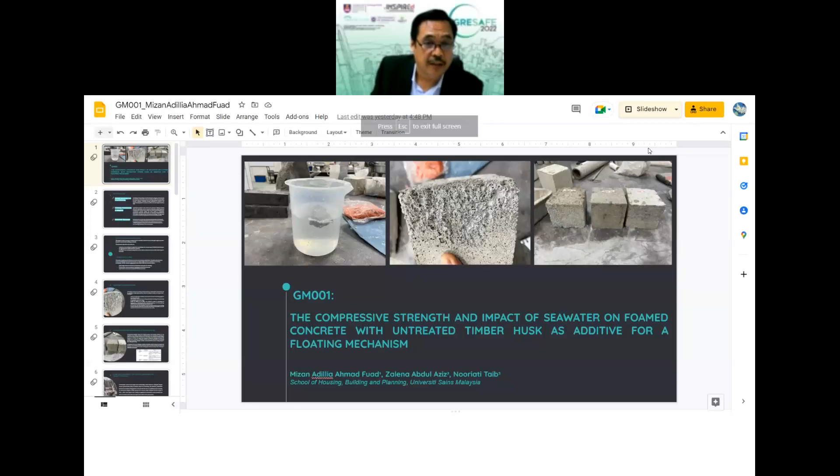Hello? Yes. All right, okay. Assalamualaikum and a very good evening to everyone. My name is Mizan Adillia binti Ahmad Fuad from the School of Housing, Building and Planning, Universiti Sains Malaysia. Today I will be presenting my paper GM001 titled The Compressive Strength and Impact of Seawater on Foamed Concrete with Untreated Timber Husk as Additive for a Floating Mechanism. So to start off,

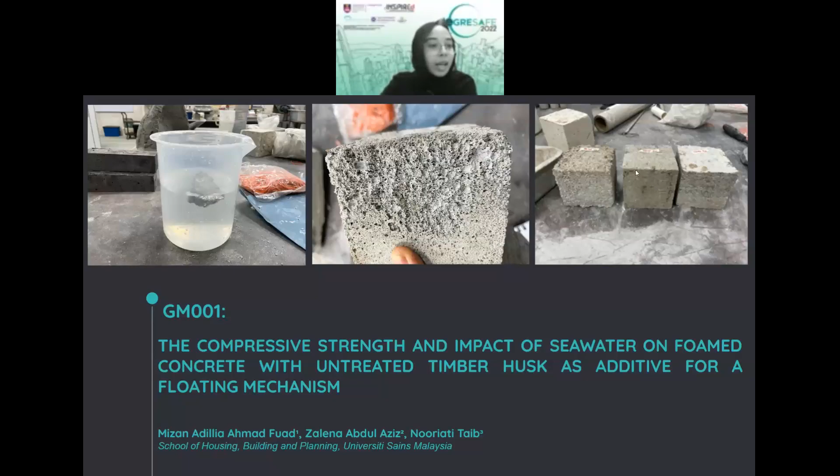I start off with three issues covered inside the paper, which are global warming and land scarcity that is said to be happening, thus causing sea rise level, and the scenario in most cities with the scarcity of land for building development. Therefore, the initiative to create a floating architecture shall be created to counter this issue.

When we come to floating architecture, a suitable material shall be chosen. For this paper, lightweight concrete is chosen because it is a very well known building material that is very diverse and universal. It has a very low density, suitable for the floating structure. But having said that, we come to the exposure of seawater. This material, however, is prone to corrosion, which will reduce the lifespan of the lightweight concrete and its properties.

So for the research objective, it is made to study the timber husk as another element mixed with foamed concrete for the building material. In this research, we aim to first compare the density and the compressive strength of different percentages of timber husk incorporated inside the foamed concrete, and after the concrete is submerged in seawater.

To further analyze, the paper started off with a literature study which covers three sections: the foamed concrete and its properties, construction waste material as aggregate in foamed concrete, and also the impact of seawater towards the foamed concrete.

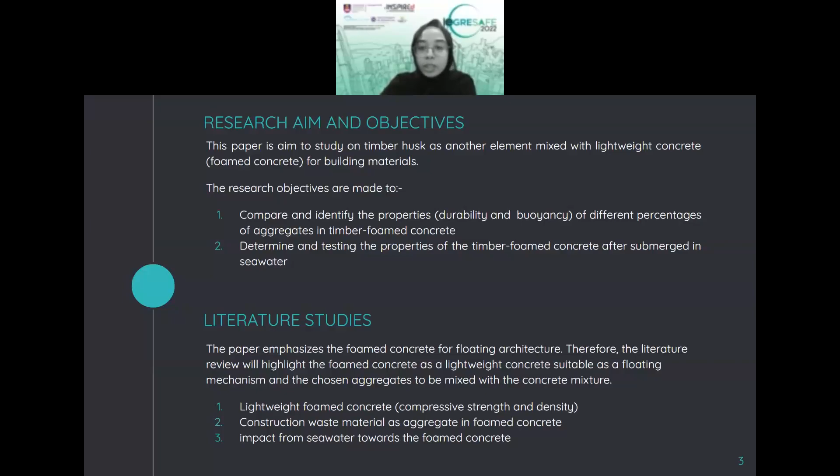So for the lightweight foamed concrete, it is ideally a concrete with air voids made from a foaming agent, which hold a very low density and minimal use of aggregate. This material is better in preserving aggregate, considering that our construction industry is one of the primary users of non-renewable resources, which is sand.

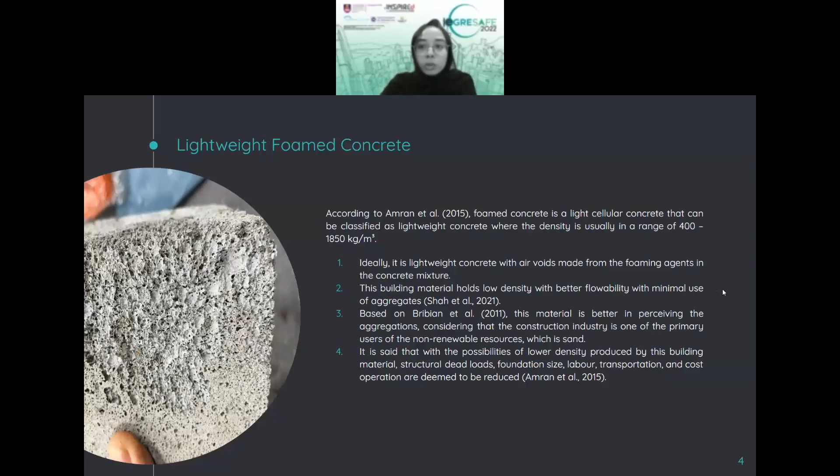When it comes to lightweight foamed concrete, the two properties I want to highlight in the paper are the compressive strength and the density. Compressive strength is the quality of concrete that withstands the load and pressure of the formed concrete itself, and the strength can vary for foamed concrete between 1 to 25 megapascals.

Moving to construction waste material as aggregate in foam concrete, why I chose timber husk is because, to create the foam concrete mixture, studies on construction waste material were made to choose the best suitable waste as additive for the research paper.

Despite several government policy measures aimed at addressing the problem, sustainable resources and waste management on the job site remain a low priority for the majority of contractors in our field. From the literature studies made, I chose timber because it is the highest waste in Malaysia for the construction industry, and it offers a very suitable material to be mixed with concrete due to its sustainability.

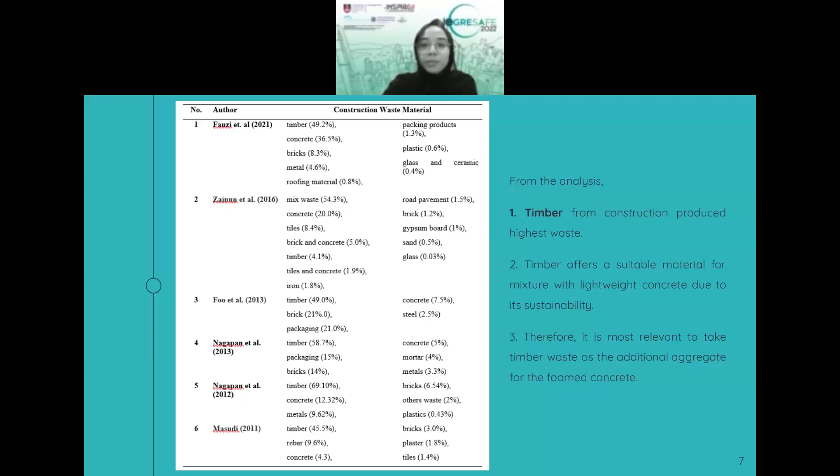Moving on to the last literature review I've made, which is the seawater impact towards the foam concrete. This shows that when we expose any materials in seawater, we will face a deterioration process caused by the complex biological attack process, involving the movement of ions in the concrete mixture and the chemical reaction from the sulfate ion towards other ions from the seawater.

This will affect the properties and the compressive strength of the concrete after being submerged in seawater, somehow affecting the lifespan and the properties, the strength, and everything about the concrete. So this is some of the research on the deterioration process from the material, concrete, impact from the seawater itself.

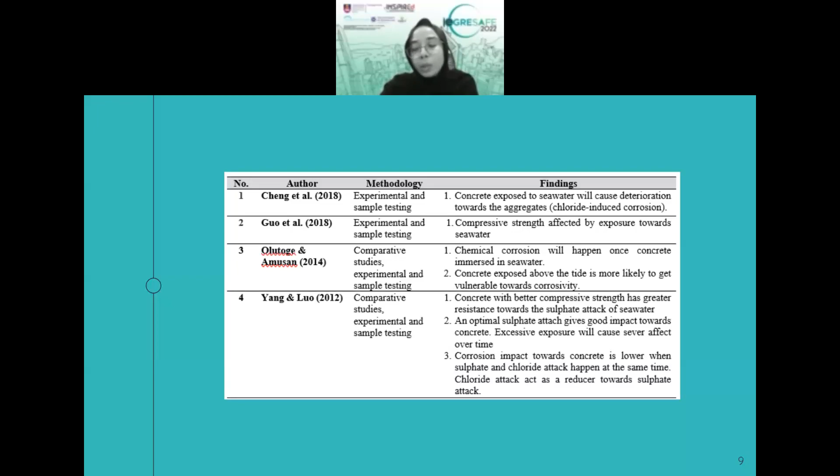Coming towards the material and methodology, in this paper I use a quantitative method where experimental and laboratory testing are used to analyze the result further. The experimental method is taken to test the timber foam concrete and to analyze the impact of the timber husk additive on the foam concrete properties itself.

The process of data analysis involves 3 steps: preparation of the materials, preparation of the concrete mixture, and the laboratory experiment, where I will test the density, the compressive strength, and also the compressive strength after each concrete is submerged in seawater.

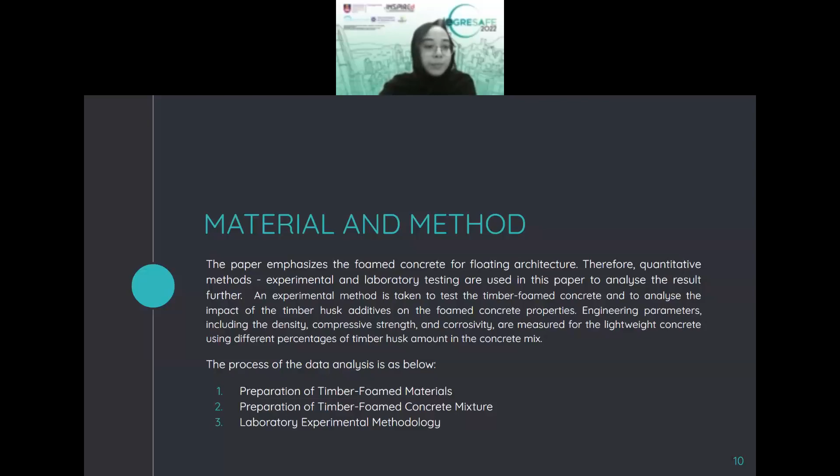The forming agent I use is a protein foaming agent for the concrete mixture, which is the Noraite PA1. For the responding variable, I will be testing the density and compressive strength of the timber concrete for different curing periods, on the 7, 14, and 28 days of curing, and also after I submerge the concrete into seawater.

Coming next is the preparation of the timber husk concrete mixture. For this, I will cover the preparation of mixtures where 0, 5, 10%, and also 15% of timber husk is used.

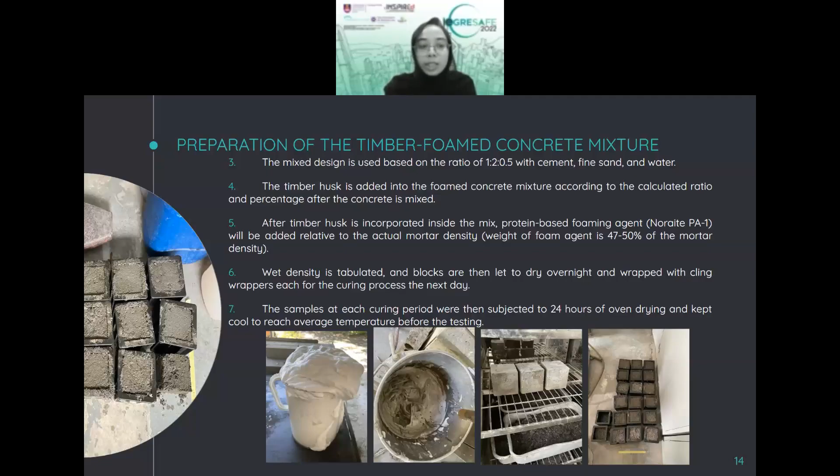When coming to testing the sample, each block will be subjected to 24 hours of oven drying and kept cool to reach the average temperature before testing started.

Moving on to the laboratory experiment. For this research paper, as mentioned earlier, I will take the density and compressive strength of each sample. After 3 weeks of submerging samples into seawater, samples will be tested again to check the compressive strength.

The analysis of the surface of the concrete is then captured so I can see if there is any cracking or white deposits coming from the deterioration effect of the seawater on the concrete form itself. The data is then compared afterwards.

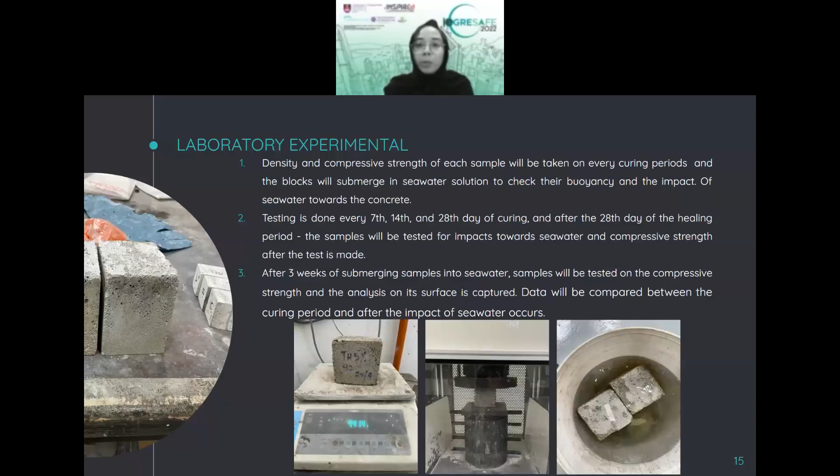We have come to the results and discussion. The first one is density, where the density of all samples shows a good reading, as it shows readings below 1,000 kilograms per cubic meter, proving this material would be able to float in seawater.

The highest reading for density was during the 28 days curing period, shown here, and the lowest was during the 7 days curing period. However, the density after submerging in seawater has increased.

This is the density after submerging in seawater, and it's due to the material's properties, where foam concrete is very porous, and the timber husk additive itself can easily absorb water. This will somehow affect the density after putting it inside the seawater.

This shows the situation when I put every material at every percentage inside the seawater. All samples show that they can float. However, TH15, where I use 15% of timber husk, has the shortest ability to float in water. This might be due to the excess amount of timber husk, as timber properties readily absorb water.

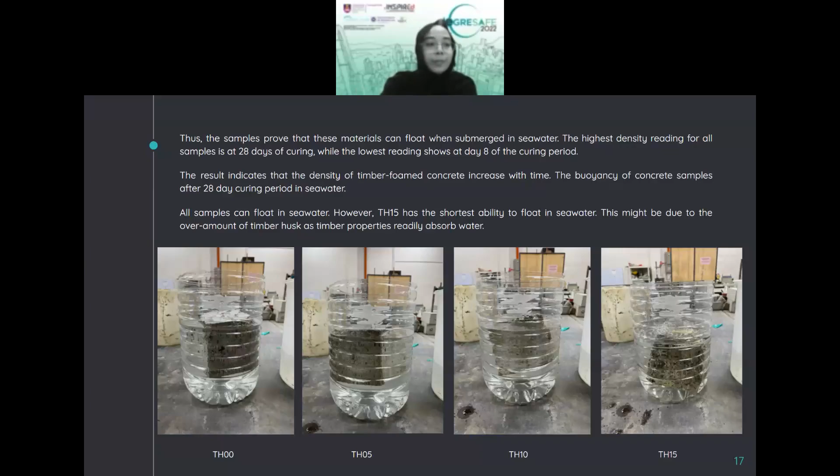Moving on to the second part, the compressive strength. The highest compressive strength was produced during the 28 days curing period, justified by the stable state of concrete properties, because 28 days is when concrete properties reach a stable state. This shows that compressive strength reading increases as the curing period increases, as seen from the graph.

The best foam concrete is when we use 5% of timber husk inside the foam concrete at the 28 days curing period, where the reading shows 2.27 megapascal. However, after submerging in seawater, the reading reduces very rapidly. This might indicate the need for a better additive to be used.

Analyzing the impact of seawater on the sample, here are some pictures I took of the surfaces. This shows the before and after of when I submerged the concrete into the seawater.

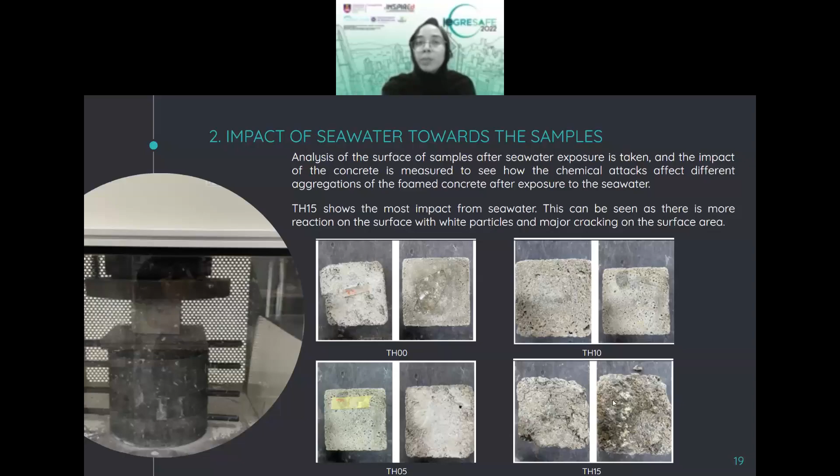Analysis of the concrete surfaces exposed to seawater shows some differences due to chemical attack. Based on my analysis, TH15, with 15% timber husk inside the foam, shows a very obvious reaction to seawater. TH5 and TH10, with 5% and 10% timber husk, show fairly little cracking and white deposits from the seawater. However, TH15 shows a very large amount of white deposits around the surface.

So the impact of seawater towards the sample: what I can say from the experiment is that TH5 shows the best ability and compressive strength after being submerged in seawater. Even though it still decreases, it still managed to produce the best reading for compressive strength, despite getting lower.

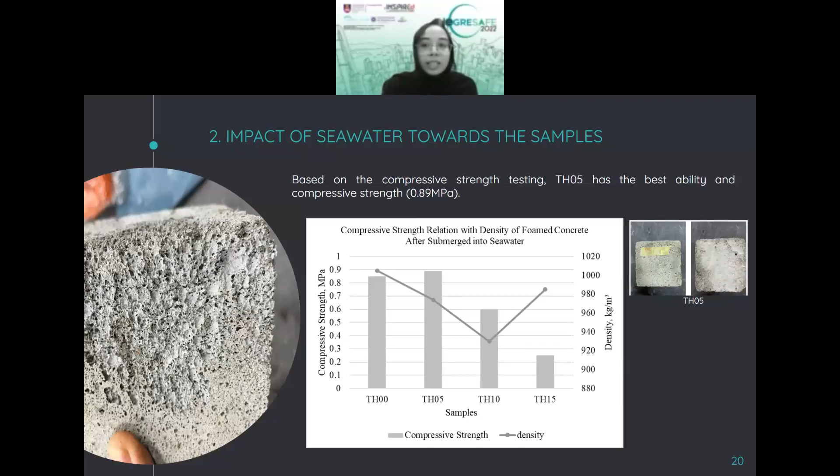And so as the conclusion, what I can say from the research paper is that the research showed the ability to create foam concrete with timber husk as a reliable additive material. But having said that, there is an ideal or optimum amount of timber husk to be added to the mixture itself. From the research paper, I could say that 5% of untreated timber husk is the ideal amount for the foam concrete mixture.

And this proved, however, that timber husk aggregation for foam concrete is better than standard foam concrete because it produces better strength, and at the same time it produces almost the same density, which is able to float in seawater. Besides that, it shows that the timber concrete is able to float and can be used as a floating mechanism in architecture.

So the impact of seawater exposure, however, is a major concern for now. It needs further analysis and a longer timeline for the experiment in order to enhance the material and the additive for foam concrete as floating architecture. So I think that's that.

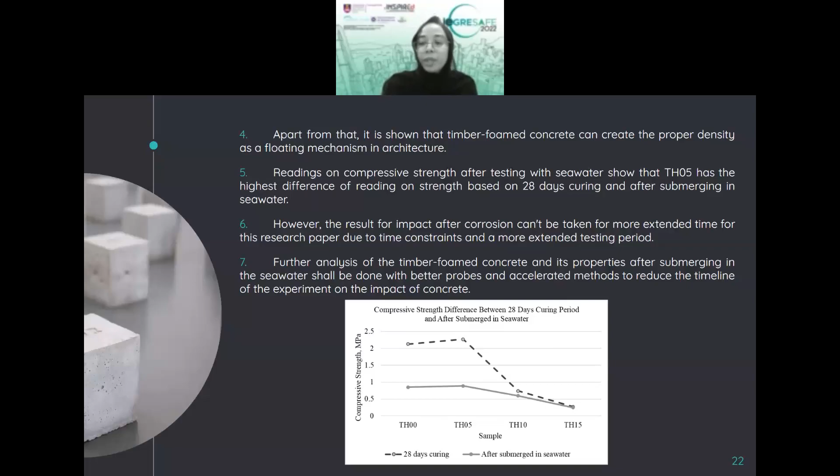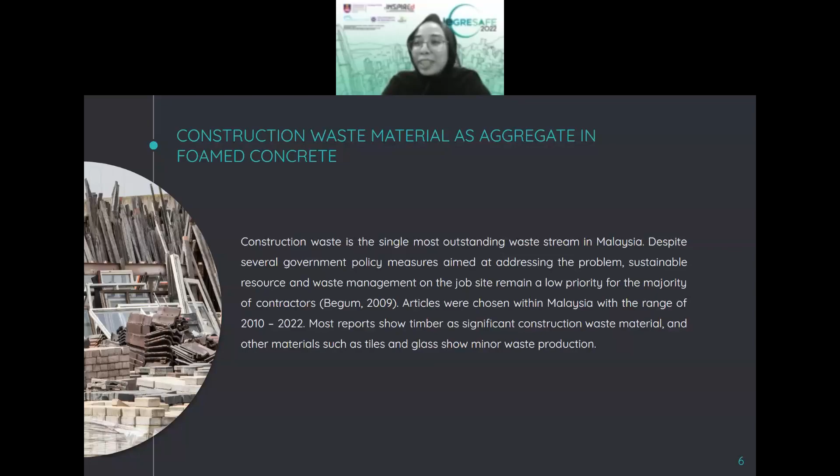May I know what is the foam flow rate for the foam generator? Come again? From Dr. Izzat, I think. May I know what is the foam flow rate? Oh, I'm sorry, I don't have the specification for that, unfortunately. Oh, okay, never mind. Any other questions?

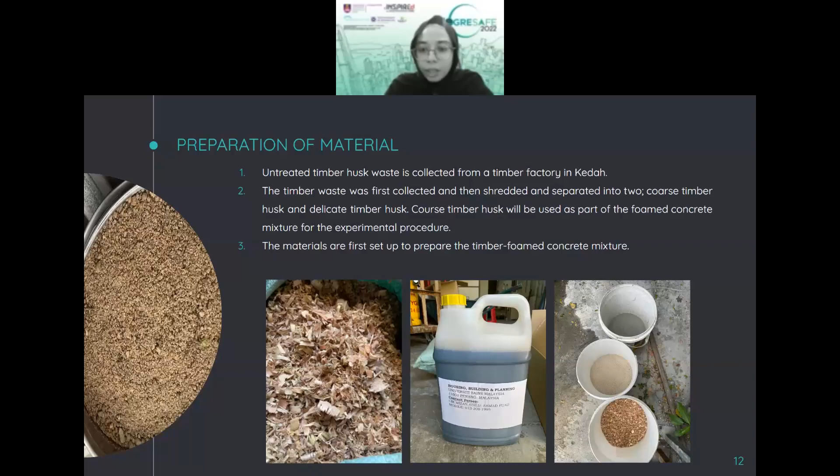Anyway, what's the foaming agent that you use? For the foaming agent, I use a protein-based foaming agent. So I took the Noraite PA-1. Yeah, this one. This is basically what I got from my school. So this is the protein-based foaming agent.

Okay, maybe I missed something. But what's the difference between your samples in terms of the density of the timber husk? Is it a different type of timber, or how? So basically, it uses the same material for the timber husk, untreated timber husk. The difference is the percentage of timber husk I put inside the foam concrete.

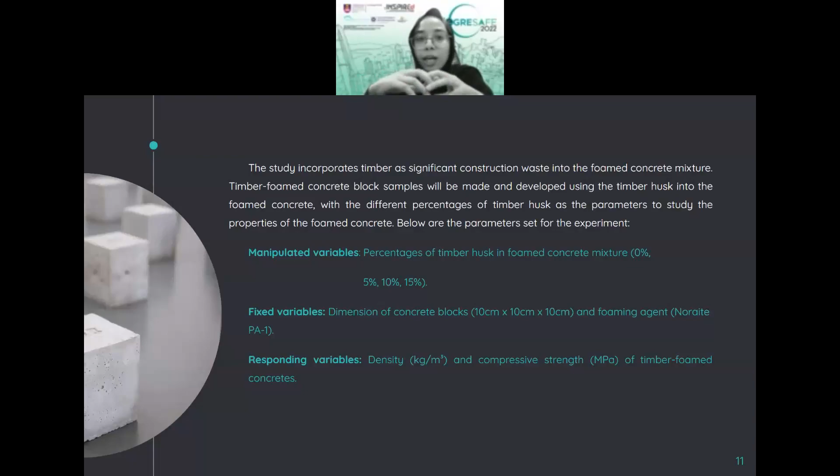So, for example, for A I put 5% of timber husk inside the foam concrete, and then for B, 10%, and then 15%. And I also made the standardized one where I use 0%, to see the conventional foam concrete and compare the differences. Okay, very good, very interesting.

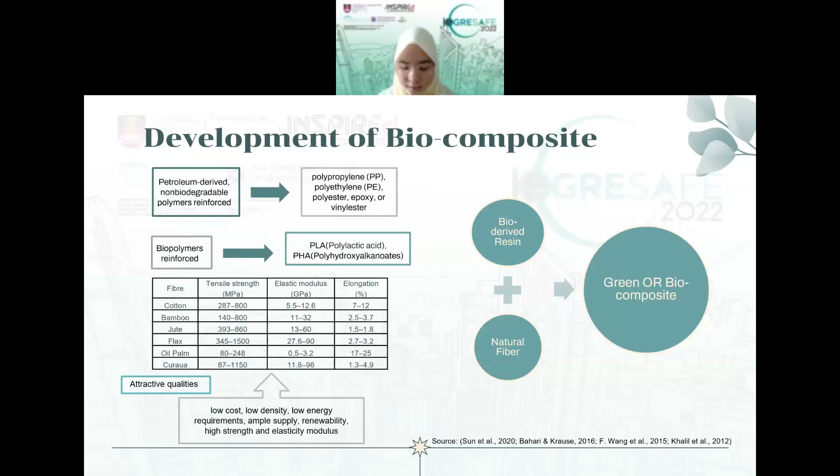So for the bamboo species in Malaysia, because I focus on bamboo, we have 67 total bamboo species in Malaysia, 25 endangered species, 13 commercially used, and 25 exotic species. There are several bamboo species distributed in Malaysia, such as buluh minyak, buluh semiliam, buluh beti, buluh dinding, and buluh semantan. So bamboo also has several attractive qualities such as affordable, plentiful, sustainable resource, economical, strength, environmentally friendly compared to most plants.

So these are the classification of bamboo fiber biocomposite. We can divide it into several elements such as strip, strand, flake, and fiber. For samples of bamboo biocomposite products, we have bamboo mat board, ply bamboo, glued laminated board, bamboo oriented strand board, and so on.

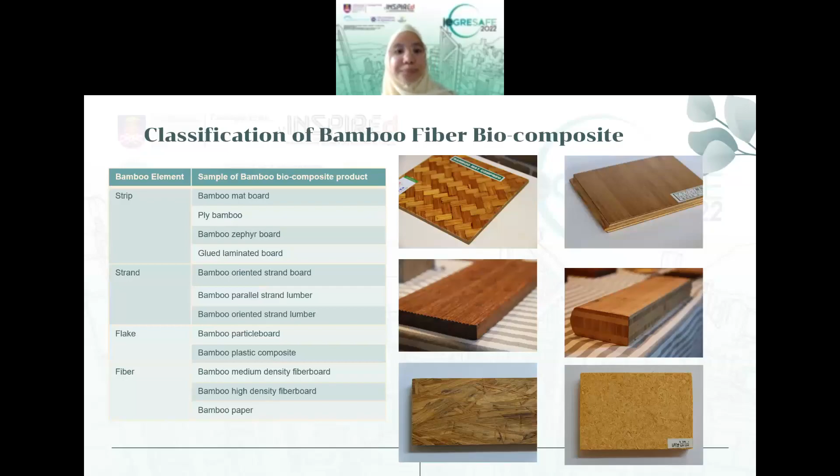So there are several factors influencing the mechanical properties of bamboo fibers, such as moisture content; we know that moisture can cause damage to the fiber matrix interface, resulting in inefficient stress transfer from the matrix to the reinforcement. Degree of cure, which is bamboo possesses the natural honeycomb fiber reinforced composite materials. Extraction of bamboo fiber, which is bamboo fiber can be removed mechanically, chemically, or a combination of the two methods. Orientation and fiber length, which is the orientation of fiber could affect the mechanical properties. And bamboo fiber matrix adhesion, which is there are a few methods that can improve the mechanical properties of bamboo fiber reinforced composites, especially the interface between the fiber and the matrix.

So now we go through the moisture content of the bamboo fiber. We know that moisture content can alter the property of the polymer matrix and the natural fiber itself. The process of degradation will cause swelling of the cellulose fiber, which creates stress at the interface and leads to the formation of micro cracking in the matrix around the swollen fiber, which will cause debonding between the fiber and the matrix.

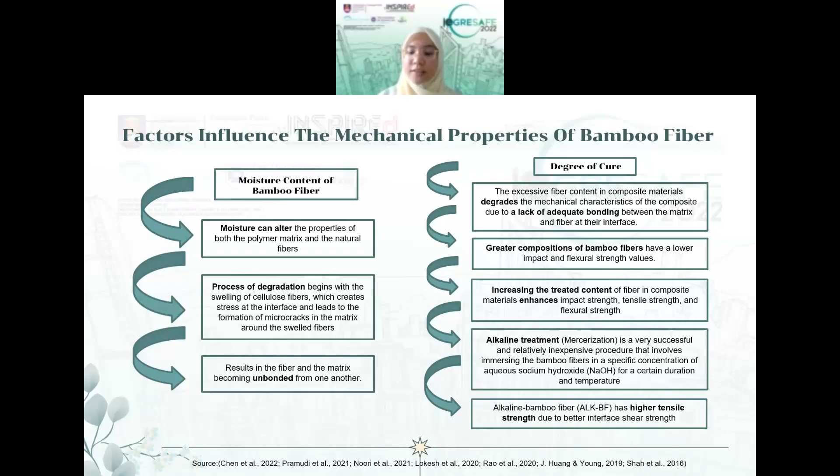So for the extraction of bamboo fiber, it's proven that steam explosion is the best method of extraction for creating high strength bamboo fiber. While for the orientation and the fiber length, when the bamboo fiber length is constant, the tensile strength and Young's modulus of bamboo fiber composite will increase when the bamboo diameter decreases.

So these are for the bamboo fiber matrix adhesion. We can see that in 2016, there are thermosetting matrices, which produce high strength and stiffness values. For bamboo fiber reinforced epoxy, as I mentioned earlier, when the bamboo fiber is treated in alkali, it has a smooth fracture surface, which resulted in better mechanical properties. Bamboo reinforced polyethylene showed that it reached the highest strength. And bamboo reinforced composite epoxy, polyester, vinyl ester resulted in stronger adhesive behavior, which improved resistance to fatigue and micro cracking.

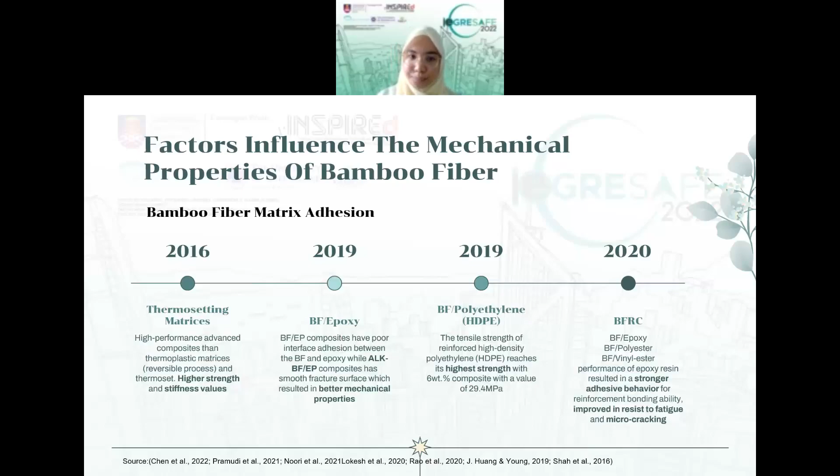So for the conclusion of the review, it showed that bamboo fiber biocomposites are potential candidates for replacing synthetic fiber, as they possess excellent properties such as low density, low cost, high impact resistance, high flexibility, low specific gravity, biodegradability, biocompatibility, and renewability.

But the improper selection of bamboo species would affect the manufacturing process, treatment technique, and durability. This is because bamboo fiber has poor wettability and lower moisture resistance, but it can be fixed with chemical treatments. So the amount of cellulose and hemicellulose has a significant impact on the mechanical characteristics, and also the diameter, length of fiber, fiber content, and manufacturing method are elements that influence the mechanical property of composites.

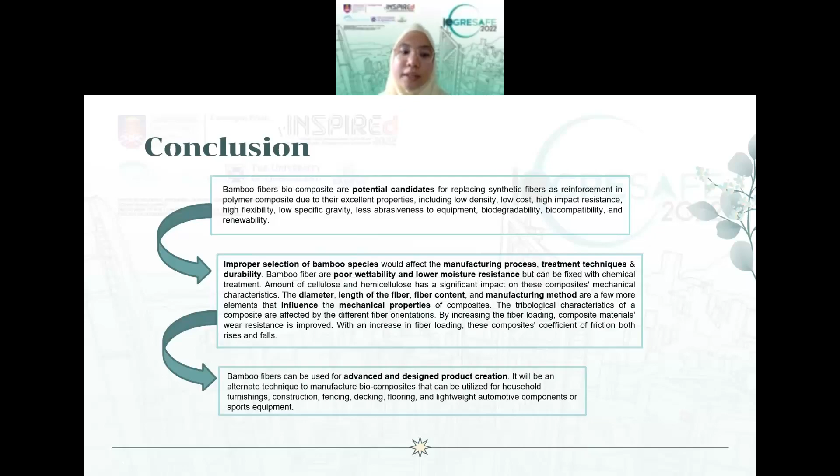So it's proven that bamboo fiber can be used for advanced and design product creation, which can be an alternate technique to manufacture biocomposites that can be utilized for household furnishing, construction, fencing, decking, flooring, and lightweight automotive components or sports equipment. Thank you. That's all for me.

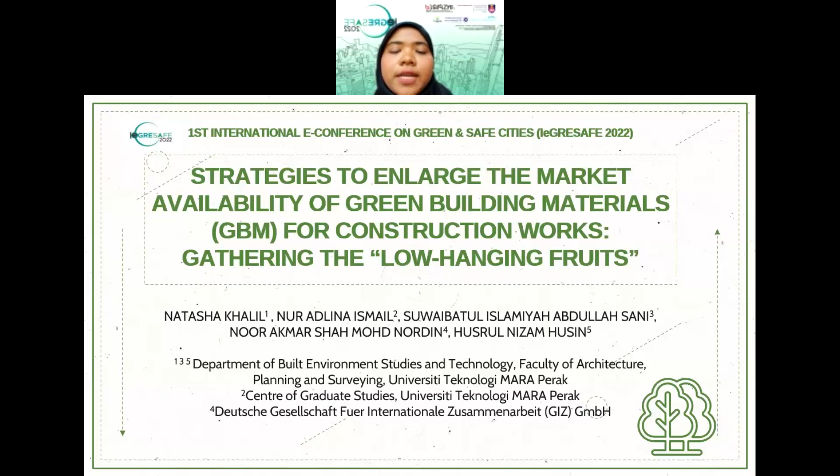As you can see on the screen, our topic for today is strategies to enlarge the market availability of green building materials for construction work, gathering the low-hanging fruits. This is the outline for my presentation today.

For the introduction and background of the research, Green Building Index, GBI, is known as the first green building rating tool recognized in Malaysia. Among the criteria addressed in GBI, utilization of green products and green materials for building construction, GBM, is the easiest way to make a building green, and is addressed as one of the strategic initiatives and best practice requirements by construction stakeholders in implementing green building projects. Application of GBM also gives many advantages such as increased building quality performance and preventing health problems. Then we move to the problem statement.

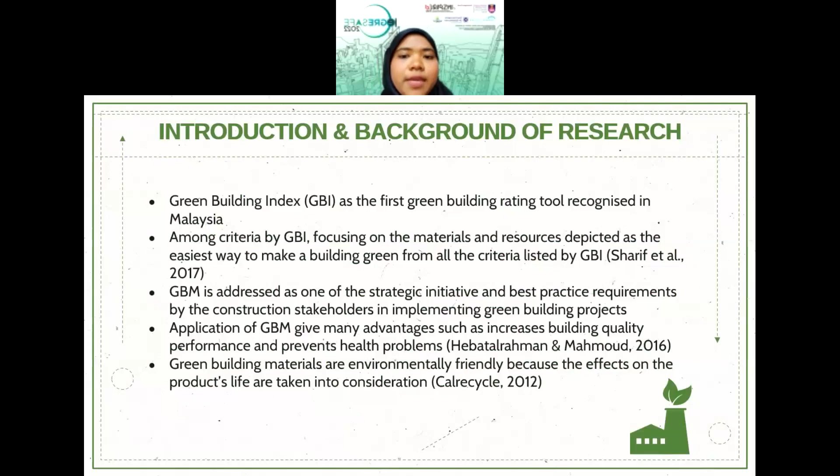Yi et al. has stated that despite its advantages, the implementation of GBM still remains low since it was introduced in 2009. The major issue comes from the financial aspects, as construction stakeholders are always concerned about the financial aspect since implementing GBM requires a very high initial cost.

Other than that, the listed products in the Green Product Scoring System (GPSS) by the Public Works Department (JKR) are not mainly focused on local products, which means the listed green products are also sourced from Global Eco-labeling Network countries such as Australia, Brazil, China, Germany, India, and Indonesia.

The third issue is that the listed eco-label products registered in the My Hijau directory are still lacking in the category of construction materials. In other words, there are not many choices of green building materials for construction listed in My Hijau directory, and this becomes a challenge for construction stakeholders to enhance the utilization of green materials in construction.

The next issue is that the government is unaware of the environmental problems and value of green practice, and the construction industry will not concern itself with the crisis. Without government interference coming up with strict legislation and encouragement, the implementation of GBM in construction projects would still be low. The last issue is that the development of GBM in the construction industry is affected by the low level of knowledge in this field.

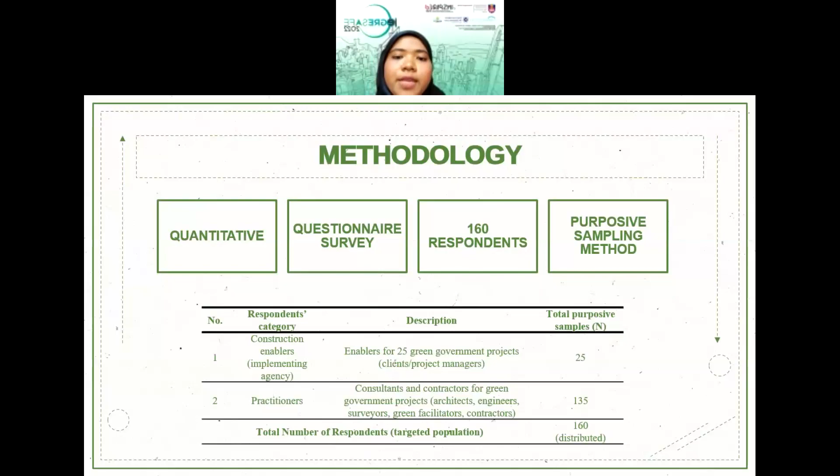We then move on to the analysis of survey results, which is comprised of demographic background, the low-hanging fruit strategies in enlarging the market of GBM in Malaysia, and the last part is the discussion of the results.

The second part is the key catalyst or low-hanging fruit strategies in enlarging the market of green building materials in Malaysia's construction sector.

The highest mean score is the adoption of green procurement for green products and services, accepted as the strategy majorly agreed by the respondents. It is followed by enforcement of green building material through government policies and regulations, and raising public awareness about GBM with sufficient information, ranked second and third respectively.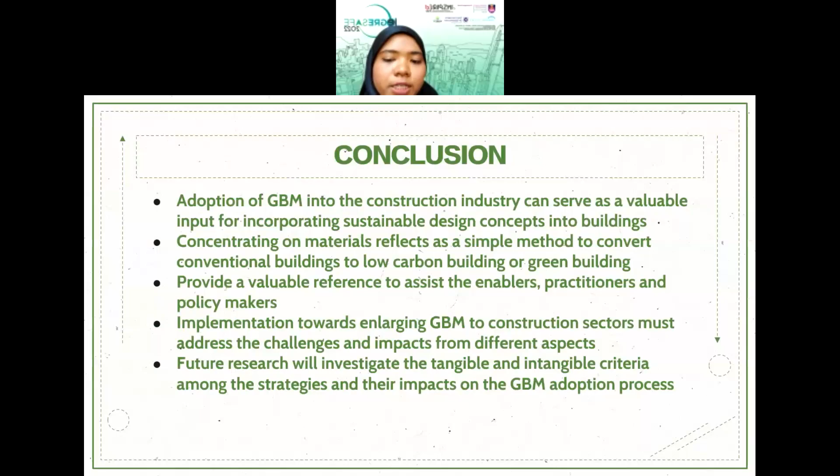The research findings provide a valuable reference to assist enablers, practitioners and policymakers in developing practical strategies for enlarging the market availability of GBM adoption in construction works. However, implementation toward enlarging GBM in the construction sector might face challenges and impacts from different aspects. Hence, future research will investigate the tangible and intangible criteria among the strategies and their impact on the GBM adoption process. That's all from me, thank you.

Wow, wonderful, very good presentation. But I think this is still in an early and exploratory stage of research.

Yes, okay, very interesting. But okay, I'll open it up for the rest. Any questions you want to ask? Miss Nor Adlina, anyone? Please, one or two questions. We still have ample time. Okay, while we're waiting for the questions...

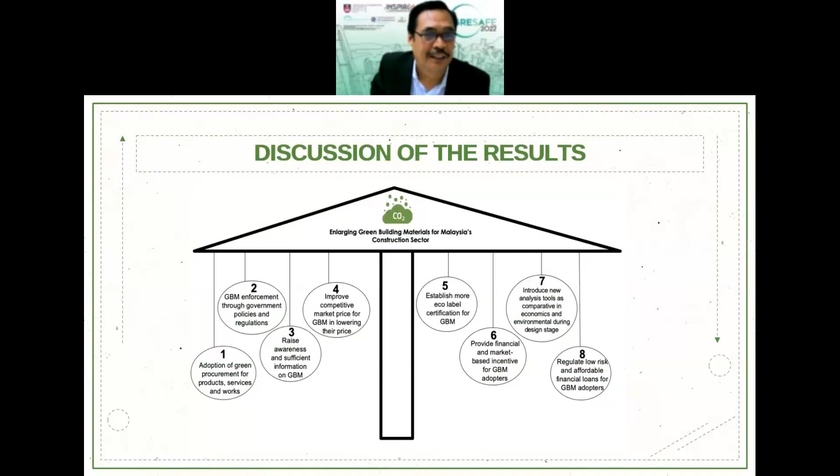Miss Nor Adlina. Yes, okay. I see one of your variables indicating... how do you go to the next one, before this, the previous slide. This one, yes, yes, just now. Previous slide, previous one. Previous, previous slide. Oh no. Yes, okay, stop, okay, okay.

Provide financial and market-based incentive for GBM adopters - this is part of the, what, the incentive, or what do you call it, how to promote the production of GBM, to promote the adoption of green materials among the developers, by having or giving certain financial incentives and so on.

By having the incentive, do you think it is acceptable or viable in terms of financial providers in Malaysia, like bankers? What do you think? Okay, Assalamualaikum, Dr.

Actually this is my research, maybe I can help Adlina answer it because Adlina is my research assistant. She is currently doing a similar study. Maybe I can try to help on the variables in the first part, when you asked about providing financial and market-based incentive for GBM adopters.

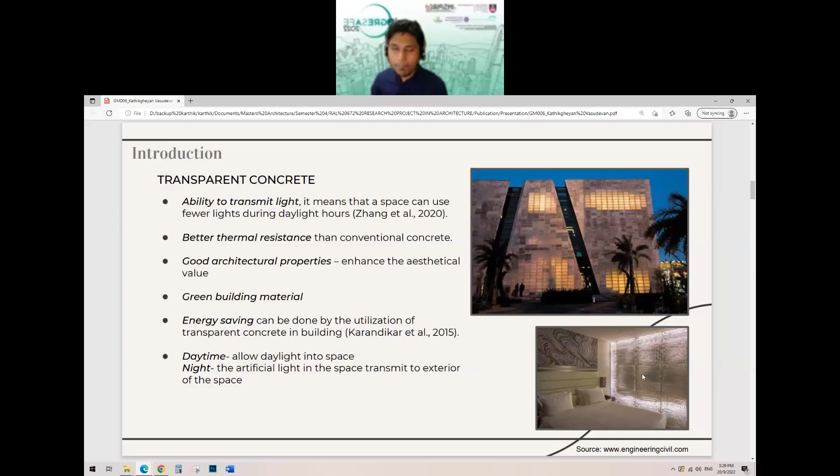For the problem statement, there are two issues I would like to highlight. The first is the high usage of energy in buildings. Based on the International Energy Agency, the construction industry uses almost 40% of all energy generated worldwide, and building energy usage accounts for 20 to 40% of overall energy consumption in industrialized nations, including the high usage of artificial lighting. The second issue is overheating in buildings. Malaysia, being a tropical country, faces a lot of issues because of the sun and incident solar radiation on buildings. Buildings nowadays use glass as a building facade for aesthetic value and to achieve a modern design.

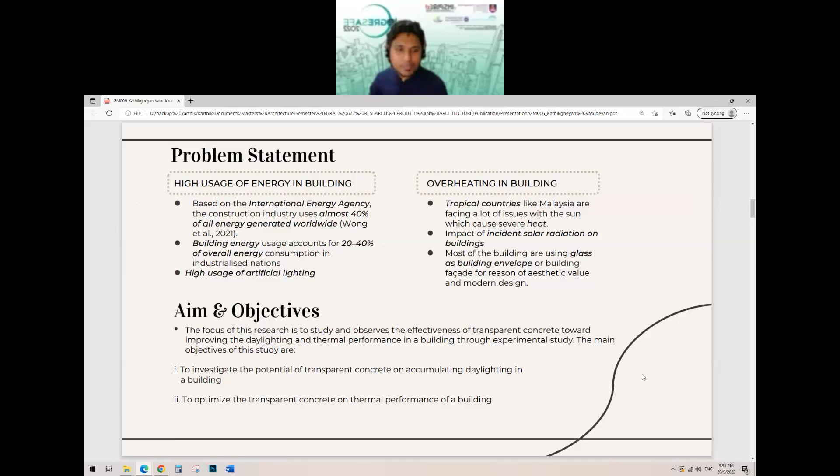The aim and objective of my study is to focus on the effectiveness of transparent concrete towards improving daylighting and thermal performance in a building through experimental study. The main objectives are to investigate the potential of transparent concrete on accumulating daylighting in a building, and to optimize transparent concrete for thermal performance. The table below shows literature studies on the effectiveness of transparent concrete on daylighting and thermal performance from the latest research papers, selected based on Asian countries and countries with a similar climate to Malaysia.

For the material and method, this research employs a quantitative method using experimental study of physical models to obtain numerical results on daylighting and thermal performance. There are 4 phases of process in this experiment, and the fixed parameters set for the experiment include the ratio of the concrete mixture, and the size and thickness of the concrete block.

The manipulated variables will be the ratio of polymethyl methacrylate (PMMA) fiber optic, and the responding variables are the temperature and the light illuminance.

The image below shows the 6 mm fiberglass chop strand and the 1 mm PMMA fiber optic cable that were used in the research.

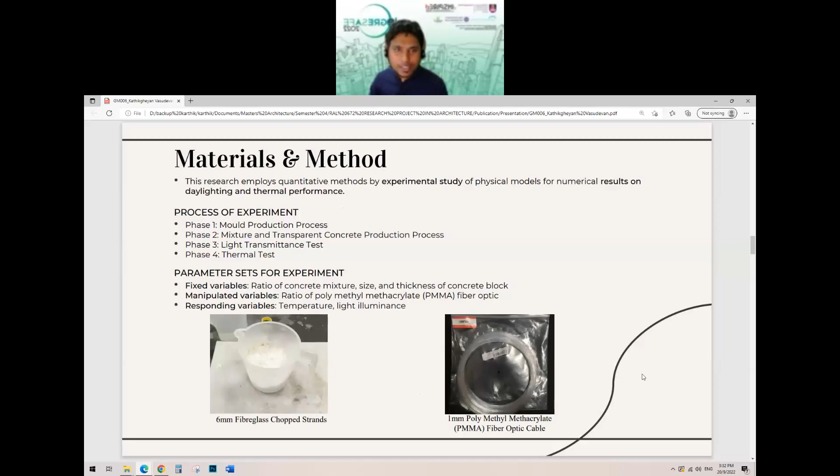For phase 1, the mold production process. The mold was made using a transparent 3 mm acrylic sheet, because my school doesn't have a mold that can produce transparent concrete, so I needed to create my own mold.

Initially, I needed to prepare the sizing and dimensions using AutoCAD software. The number and the distance between holes differ, which helps determine the degree of light transmission and thermal resistance.

The mold, created in AutoCAD, was carefully cut using a laser cutter machine, and the PMMA fiber optic were arranged according to the holes in the mold as shown in the picture below.

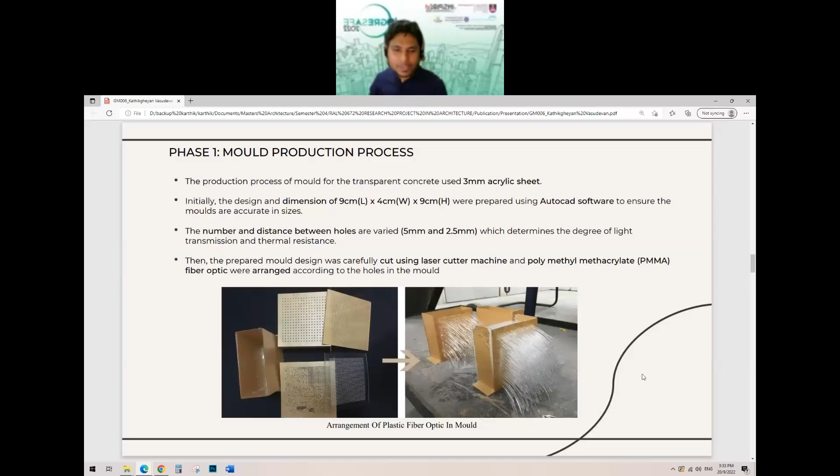The second phase is the mixture and transparent concrete production process. For this experiment, coarse aggregates were excluded, as mentioned earlier in the introduction, to avoid fiber balling issues caused by the narrow gap between the transparent materials during pouring of high fluidity concrete in the block.

For the concrete, cement was used with Sika Grout 215, and it was continuously mixed with water and the fiberglass chopped strands until the right consistency was obtained. It was mixed for 3 minutes.

After the final concrete was produced, the transparent concrete continued with the process of curing for at least 48 hours and proceeded to 28 days of curing in water, then grinding was performed to remove the molds.

These are the mix proportions, with three samples where all the materials are similar except for the number of PMMA fiber optics. Sample A is the conventional concrete, sample B has 290 fiber optics, and sample C has 560 fiber optics. The picture shows the concrete during the curing process and after curing.

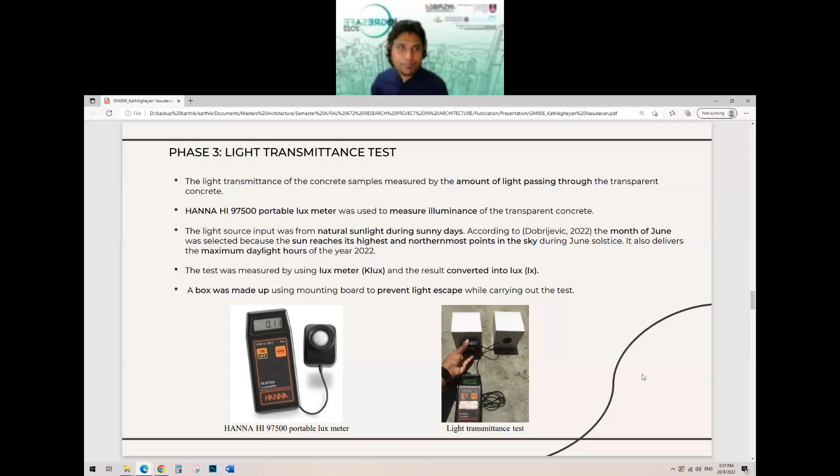For phase 4, the thermal test of the concrete sample measured the surface temperature in Celsius using an infrared thermal imaging camera.

Based on previous studies, the hottest hour of the day occurs between 3 to 5 p.m., which is 3 to 5 hours after noon. However, the local weather at the time of the experiment showed 12 p.m. to 2 p.m. had the highest outdoor temperature on the 3 days of experiment.

For the results and discussion, first will be the effect of daylighting on transparent concrete. The table below shows the transparent concrete with a higher number of fiber optics delivers higher light illuminance, even though the local weather differs across the 3 days.

It also shows using more fiber optic in the concrete allows more daylighting. These are the results for the 3 days of experiment.

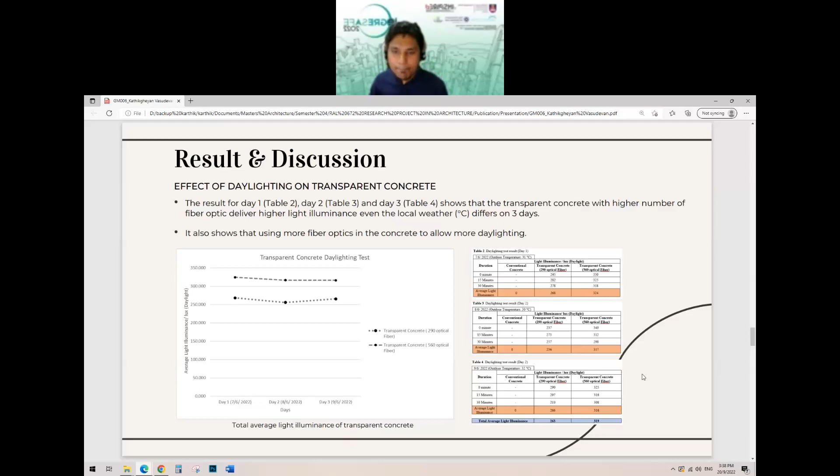The result shows the conventional concrete has the highest average temperature at 0 minutes, 15 minutes, and 30 minutes compared to transparent concrete with 290 optical fibers and 560 optical fibers.

The maximum temperature drop for day 1 is 1.44 Celsius, day 2 is 0.67 Celsius, and day 3 is 0.87 Celsius. The total average temperature difference is 0.989 Celsius. Next, the effect of solar radiation on the thermal—

Okay, sorry, continuing with that. It also shows the higher usage of fiber optic results in less thermal conductivity, and the highest temperature drop on day 1 with high surface temperature indicates the effectiveness of the fiber optic. The plastic fiber optic shows the greatest effect on thermal resistance compared to the conventional concrete.

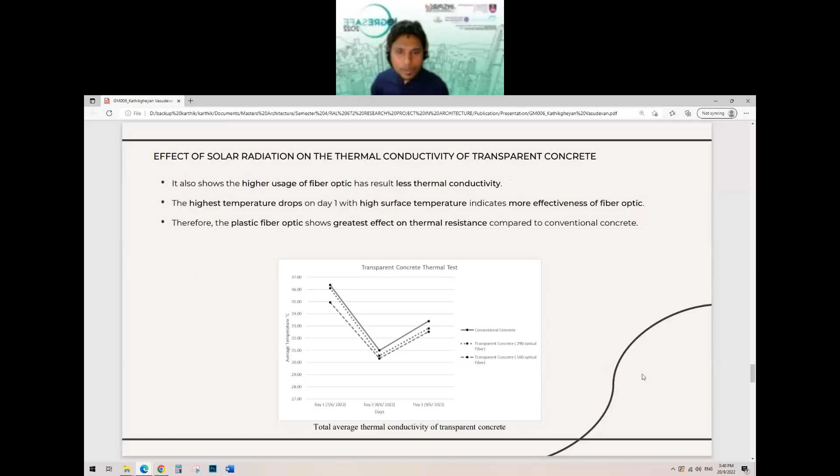For the conclusion, the transparent concrete has a distinct light transmittance property, and it can maximize the daylight usage during the daytime. At night, the transparent concrete can be visually attractive and welcoming for buildings, furniture, and hardscapes. Therefore, the plastic fiber optic shows the greatest effect on thermal resistance compared to conventional concrete. It shows improvement in light transmittance after the percentage and number of fiber optic usage increases.

The main contribution of this experiment shows that higher usage of PMMA fiber optic allows more daylighting and lowers the thermal conductivity and heat gain to a space or building. It also changes the perception of when we receive more light, the more heat conductivity.

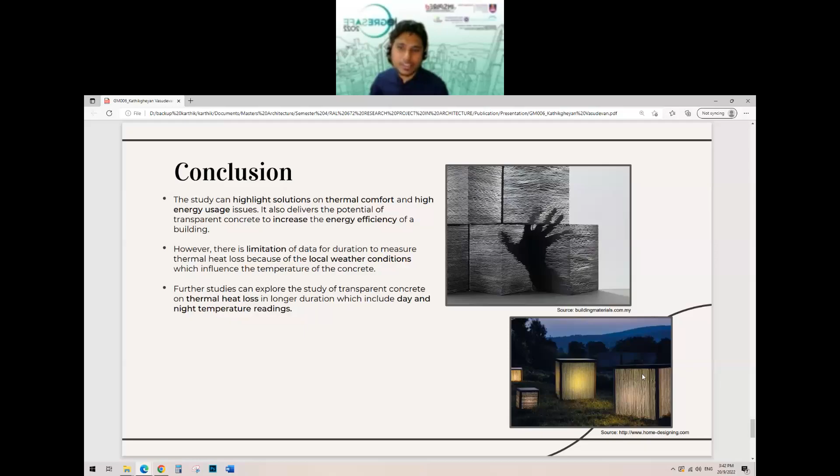Thank you very much, Mr. Karthikeyan. This is actually very interesting and new to me as well. I never came across this product or this material before, it's new to me. Thank you very much, my bad.

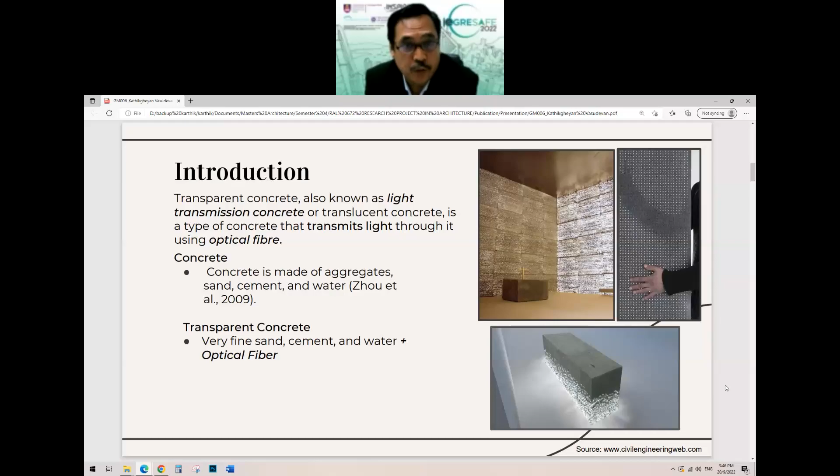Okay, anyway, thank you very much, Mr. Karthikeyan Vasudevan, for a very interesting and very wonderful presentation. Thank you very much. Thank you, Doctor. Thank you.

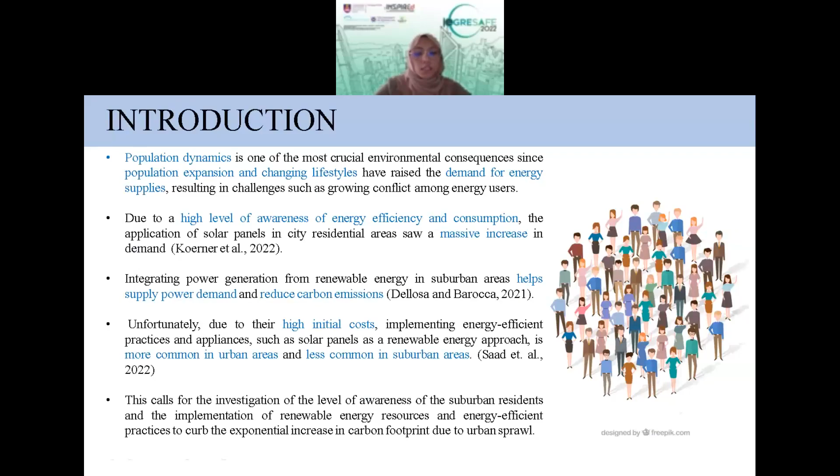Because of this, this calls for the investigation of the level of awareness of suburban residents and the implementation of renewable energy resources. For the aim and objectives: the aim is to establish the need to use energy efficient and renewable energy in monitoring the carbon footprint caused by urban sprawl. The objectives are to investigate the level of awareness of Melaka city suburban residents on

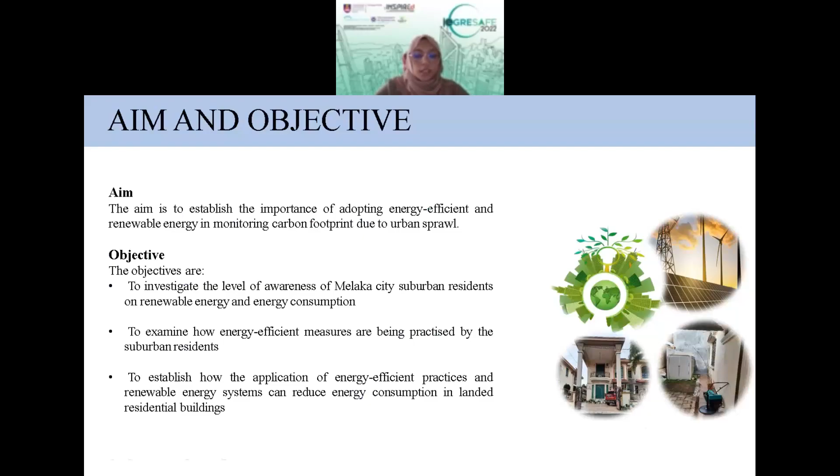renewable energy and energy consumption, to examine how suburban residents are practicing energy efficient measures, and lastly to establish how energy efficient practice and renewable energy systems can reduce energy consumption in landed residential buildings.

For the research review, the first is renewable energy systems in Malaysia. Malaysia has initiated hydropower projects, as seen by the 12 mega dams in Borneo under the Sarawak Corridor of Renewable Energy, for example the Bakun Dam. According to Hamzah 2019, mini hydro, biogas, solar photovoltaic (PV), solid waste, and biomass are among the renewable energy resources available in Malaysia for generating electricity.

In 2020, the entire energy output from these resources was able to generate 11,227 gigawatt hours, claimed to ascend in 2021. Solar PV made a significant contribution among these resources in Malaysia. Next is the energy efficient strategy in Malaysia.

According to Cheam 2021, solar energy offers the greatest potential of any renewable energy source in Malaysia because of the ideal geographical location in the tropical zone. The Malaysian government implements various solar power promotion programs and strategies in response to the high initial adoption cost. This allows solar PV owners to profit from the sale of generated electricity to Tenaga Nasional Berhad (TNB).

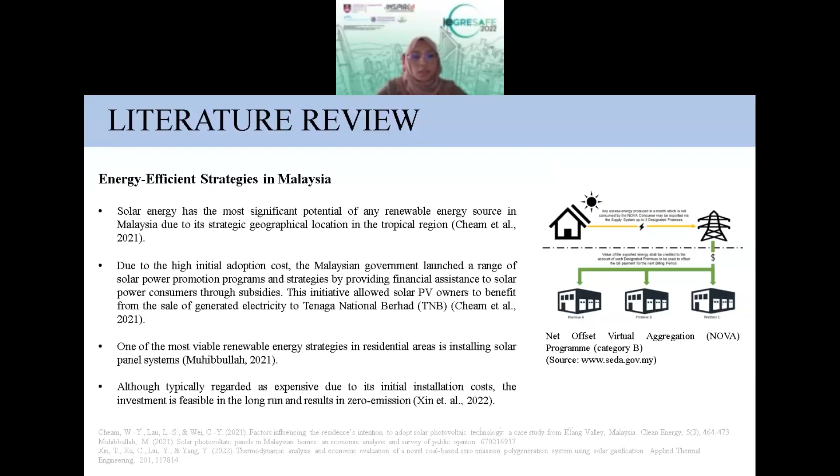Muhibbullah 2021 states that installing a solar panel system is one of the most practical renewable energy options in residential regions. Although initially pricey due to installation cost, the investment is reasonable in the long term and results in zero emission. Next is solar panel systems in Malaysian landed residences.

From the Al-Asadi studies in 2022, renewable energy in residential buildings is the key to excellent environmental sustainability. It reduces the need to burn coal and other non-renewable resources to generate electricity. PV modules on building rooftops provide shading against harsh sunlight, thus reducing the temperature input to the ceiling and the building.

Razali et al. 2020 state that residential customers who install PV solar panels at home could earn money by selling excess power to the local electricity provider, such as TNB and Sabah Electricity Sdn Bhd (SESB). According to Zain Ahmed et al. 2021, the government will execute this from 2021 to 2023 as part of the Net Energy Metering (NEM) scheme 3.0, with a total quota allocation of 800 megawatts to boost solar energy harvesting and increase renewable energy uptake.

Next, the methodology. A questionnaire survey is used in this study, which includes a variety of question styles that allow for an understanding of the use of energy efficient techniques and renewable energy systems. Three residential buildings in Taman Angsa Mas and Taman Kasawari were chosen for their location in Melaka suburban areas to collect building temperature data and investigate the renewable energy system.

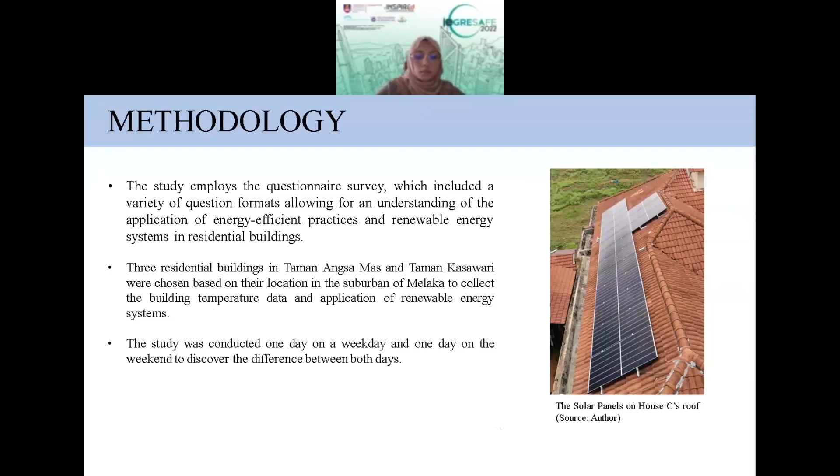To determine the difference, the study was conducted one day during the week and one day during the weekend. Next I will present the findings and discussion. The questionnaire survey was divided into three sections: respondent background, basic knowledge and level of awareness, and application of energy efficient strategies in respective residential buildings.

For the respondent background, 66.7% of the total respondents were female and the other 33.3% were male. For age, 46.7% of respondents were below 29 years old.

And then for the income group, we can see B40 is 23%, and then the majority of them is M40, which is 50%.

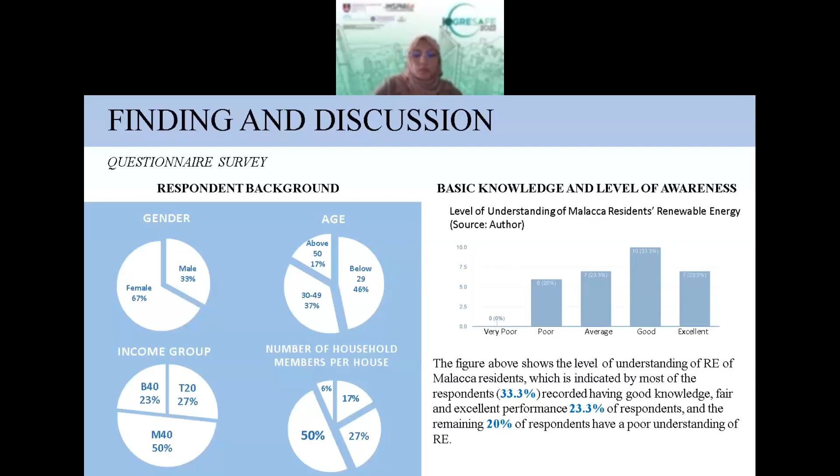So the following section is basic knowledge and level of awareness. So these figures show the level of understanding of RE of Malacca residents, as demonstrated by the majority of respondents, 33.3% having good knowledge, and then 23.3% of respondents having fair and excellent performance, while the remaining 20% have poor understanding.

Okay. For the next slide, we can see the figure on the left shows the respondents' understanding of renewable energy. The mean recorded for solar energy is 0.90, the highest of any power, implying most respondents are exposed to this RE. And then the lowest is 0.23, indicating that some respondents misidentified the renewable energy.

The figure on the right shows the respondents' awareness of electricity usage and bill. So we can see only 3.3% of respondents were uninformed of their usage and bills, whereas 96.7% were. So we can conclude that respondents' awareness of their consumption and expense is high.

Okay, next is the last data for this section. So this table shows the information about respondents' action to reduce their electricity consumption. So we can see that 46.7% of respondents indicated they will turn off the lights and electrics when not in use, and 30% of respondents say they save electricity by only using aircons at night and limiting the use of electronic equipment.

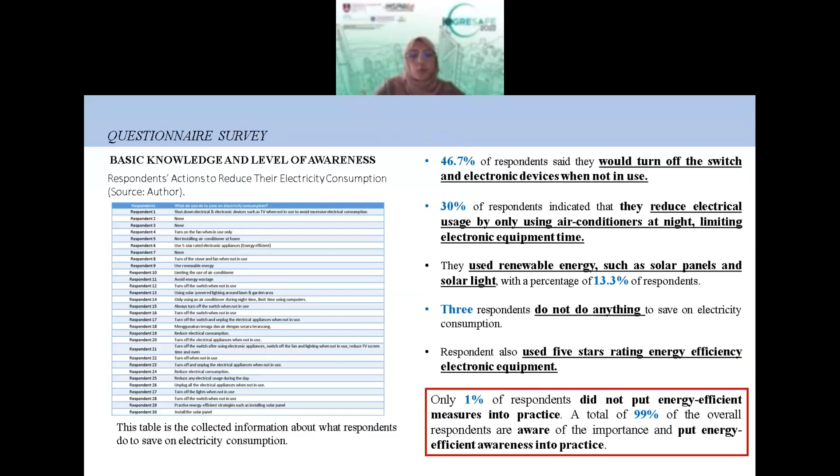Next is the application of energy efficiency and renewable energy. So the figure on the left shows the systems and technology available in the respondents' houses to save electricity consumption. We can see that the mean for LED lighting is 0.57, the greatest among the equipment, while the mean for solar lighting is 0.03 and motion sensor is 0.07, the lowest. And then the smart power board has a mean of 0.1. So finally, 26.7% of respondents have solar panels installed in their home.

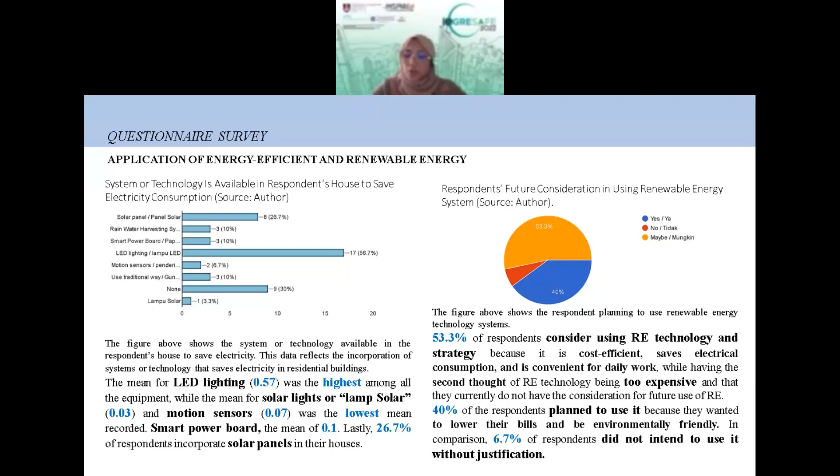So the figure on the right shows respondents' future consideration in using renewable energy systems. So we can see 53.3% of respondents consider using RE technology and strategy because it's cost efficient, saves electricity consumption, and is convenient for daily work. But at the same time, they have second thoughts because it's too expensive for them. And then 40% of the respondents plan to use it because they want to lower their bill and be environmentally friendly. In comparison, 6.7% of respondents did not intend to use it without justification.

This confirms the Al-Asadi claim that the solar panel prevents heat from being absorbed by the roof, limiting the amount of heat transferred. And then the reduced amount of heat reduces the amount of cooling necessary, assisting in reduction of the energy consumption.

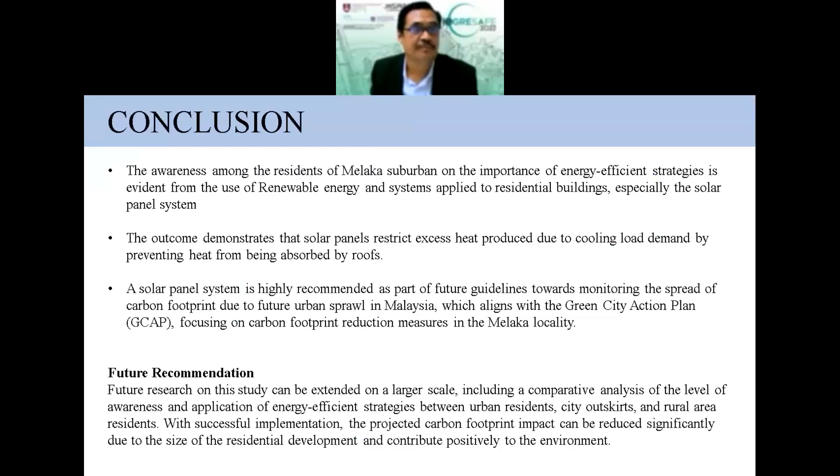So the conclusion is the use of renewable energy systems in residential buildings, particularly the solar panel system, demonstrates the Malacca suburban people's understanding of the need for energy efficient techniques. The results show that solar panels reduce excess heat generated by cooling load demand by preventing heat from being absorbed by the roof. A solar panel system is highly suggested as part of the future role in the measures to monitor

the expansion of carbon footprint owing to future urban growth, which fits with the Green City Action Plan, which focuses on carbon footprint reduction measures in the local locality. Future research could be expanded on a broader scale, including the level of awareness and application of energy efficient measures across metropolitan residents, city outskirts, and rural region residents.

Due to the size of the residential development, the predicted carbon footprint impact can be decreased with the proper implementation and contribution favorable to the environment. Thank you.

Thank you very much, Miss Nur Atika. A very good topic indeed to research. I think this is also in the early and exploratory stage of your research. Am I right? Okay. You are examining the awareness of the users or populations. Okay. My suggestions.

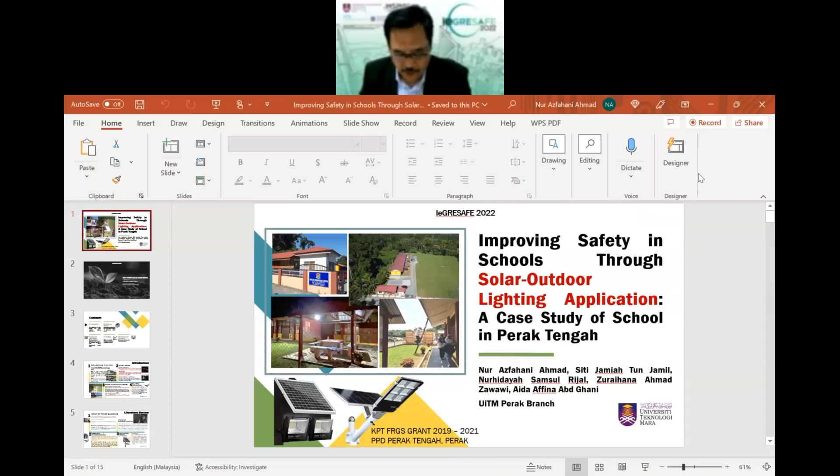Our next presenter will be presenting a very interesting topic also, under the sub-theme of renewable energy, with the topic of improving safety in school through solar outdoor lighting applications, a case study of a school in Perak Tengah. Please welcome the presenter from UiTM Perak, Associate Professor Dr. Nur Azfahani Ahmad. Over to you, Dr. Nur Azfahani.

Thank you, Dr. Fadil. Can you hear my voice clearly? Very clearly. All right, okay. Now I will share my slide. Okay.

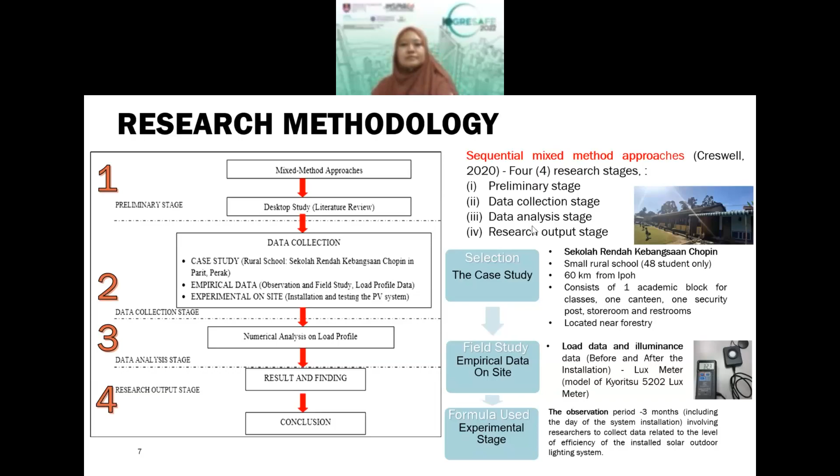So this is my case study in Perak, where you can see it's a very simple school, a small school with only one block of building for classes. Then there's one canteen, one post guard, where all of these buildings are facing a large football field. The sunrise is actually directly from the football field, whereby the northern area is the right side of the whole area. The sun comes from the east, directed to the building.

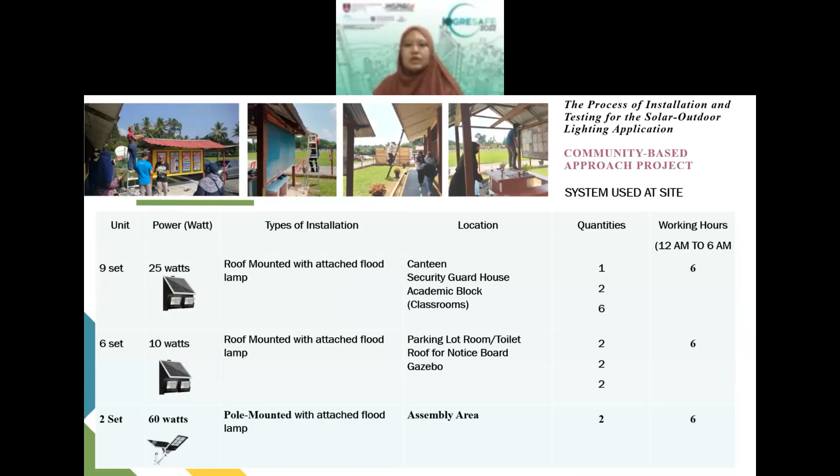This is data that we have collected under a community-based approach. Why do I call it a community-based approach project? Because we obtained help from the community surrounding this school, together with the school's teachers and also researchers from UITM, through the process of installation and testing this solar lighting application.

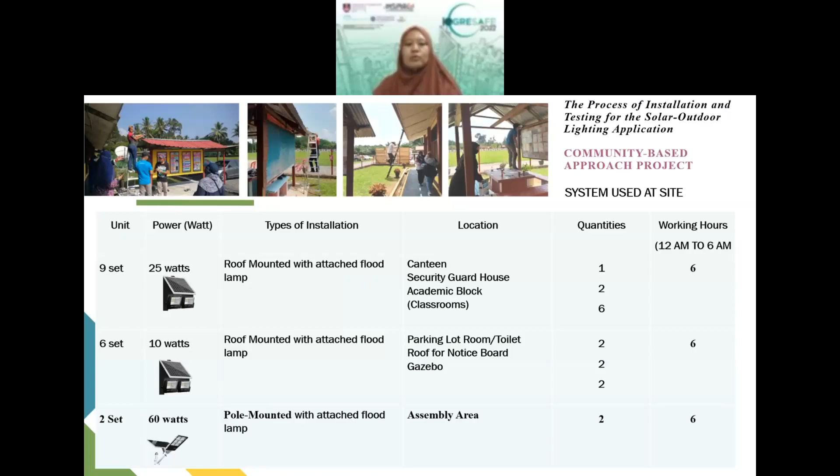As I mentioned earlier, this is a very straightforward research. We only obtained the types of solar outdoor lighting based on the suitable power watt that can be installed for each of the blocks in this building, without calculating the solar energy performance, because it will only lighten the walkway of this school. So we have 9 sets of 25 watt roof mounted solar panels, another 6 sets of 10 watt roof mounted solar panels, and another 2 sets of 60 watt pole mounted solar panels.

After the installation process, we also obtained lux meter data collection, which is used to measure the illuminance level in the case study during nighttime before the installation of this solar PV, and then after the installation, to make comparison analysis on the effectiveness of solar outdoor lighting.

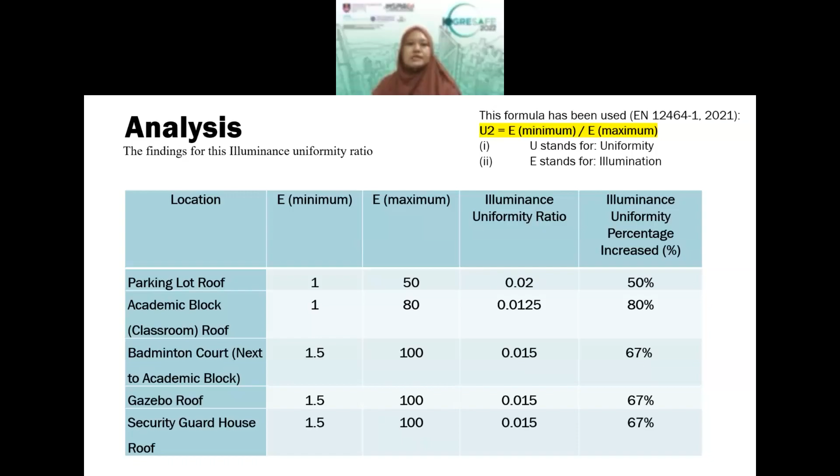This is my last slide, the final output. After this installation of the solar outdoor lighting, it is found that this school managed to improve between 50 to 80% illuminance uniformity ratio around the school. It has strengthened that by installing this solar lighting system, it provides security and illumination in the needed areas. It's also very cost effective, easy to maintain where the school management can maintain it themselves. It also helps increase the safety level of the rural school together with the community environment surrounding the school.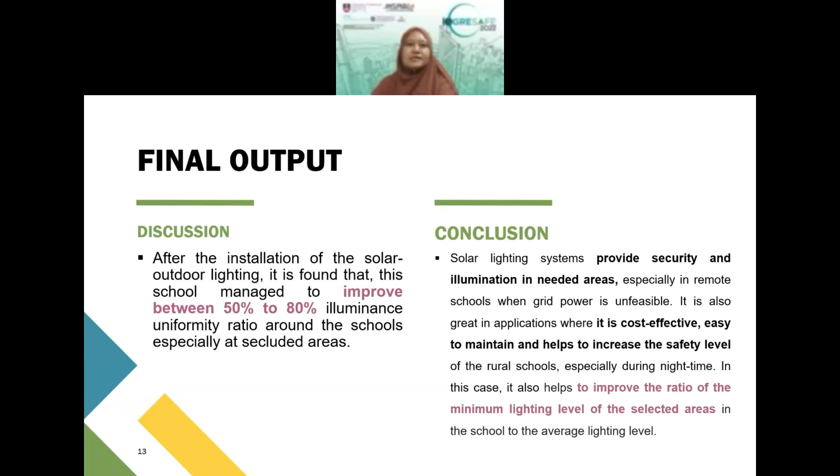So this is our research achievement, whereby this project has actually been published in the magazine, and also we have signed an MOU with the PPD. That's all. Thank you very much.

Oh, thank you very much, Associate Prof. Dr. Noasfani. Very interesting, yet very insightful presentation. Very interesting, actually. Any questions from the floor?

Any questions? Okay, by the way, from myself, PM Dr. Noasfani, we understand that the solar intensity in Malaysia substantially changes and varies throughout the year, especially in terms of its intensity and orientation. How did you address this in your research, and do you simulate these changes or differences by having specific tools or systems or anything?

Okay, thank you, Dr. Fadil. To answer that question, for the overall process of my research, as I mentioned earlier, this is actually an FRGS grant research. We have actually used certain simulation for obtaining the solar performance data. We collected the data from 8 a.m. to 2 p.m. solar peak hours, and from that data we obtain the highest irradiance for each locality, for each school. For the purpose of this paper, I only show the data related to illuminance reading before and after, because it's quite straightforward research.

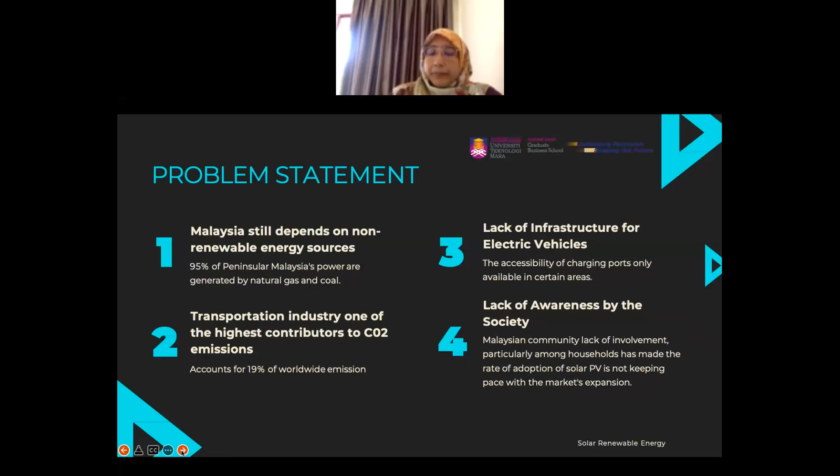So next, the objective of this study is to develop expanded use of renewable energy to boost electric vehicles and achieve the target of carbon neutrality by 2050. Basically, this presentation today is to propose a framework on how we can accelerate this initiative in terms of implementation.

For the literature review, renewable energy is seen as a potential solution, possibly the only solution to replace fossil fuel, as fossil fuels are being depleted around the world, along with the issue of global warming caused by greenhouse gas emissions.

This was studied by K. Solagi. The Malaysian government, based on all these issues happening around the world, identified solar as one of the most potential renewable energies. This was also reported by Saripuden and colleagues in 2022.

Solar can be one of the most potential renewable energies, especially in Malaysia. Our area, our climate, is actually very suitable to accelerate the use of solar energy. It is predicted that solar potential in Malaysia could be 4 times the world fossil fuel resources. So solar is one of the answers to the climate change issue in the world.

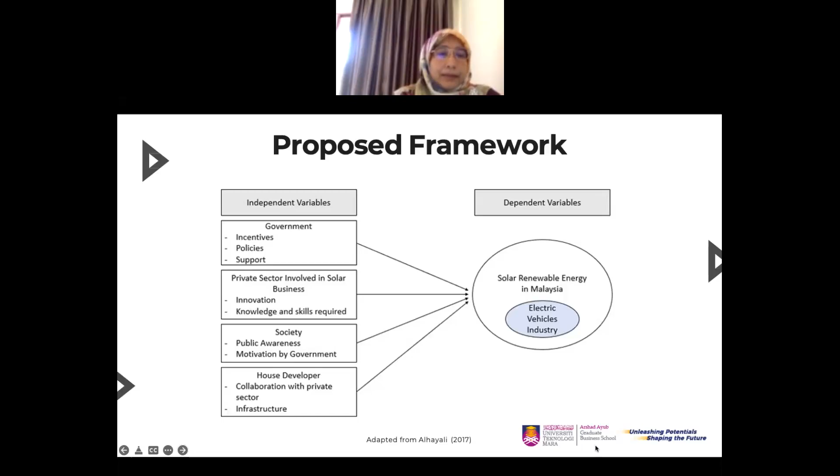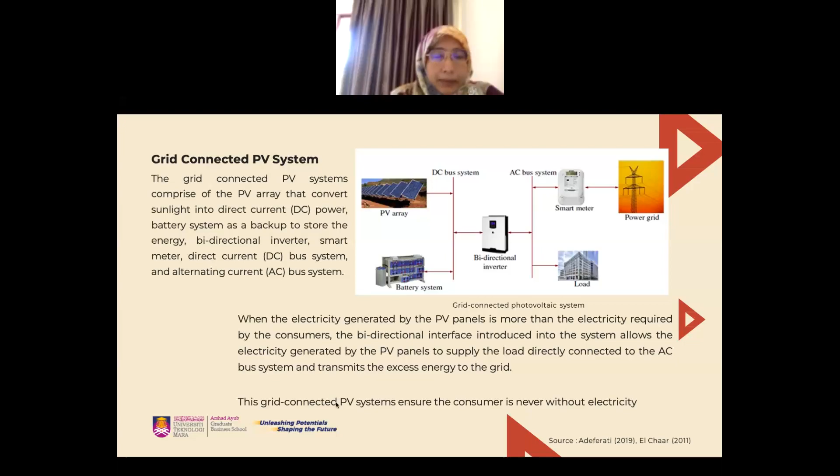When the electricity generated by the PV panels is more than the electricity required by the consumer, the bidirectional inverter allows the electricity generated by the PV panels to supply the load directly connected to the AC bus system, and transmit the excess energy to the power grid. This grid-connected PV system ensures the consumer is never without electricity. This already exists in the industry - it's there already, just to give participants some ideas on what it is, and how we can install this and implement it through government initiatives.

Solar panel in every house. This is the purpose of this study: with concerted effort from the government, house developers and business, to put solar in every house, and then there will be a central solar power storage in every housing area. That's one commitment from the house developer. Then when they have solar power storage in the housing area, we will accelerate the use of car EV chargers, and house residents can use the electric solar power. So it will be easier for the implementation part.

In discussion with society, we propose that society will have sustainable solar energy and will eventually see reduction on fossil fuel. In terms of government, speed the process to implement in order to achieve the 12th Malaysia Plan in 2050, and also for the solar energy industry, enhance projects and set benchmarks to other companies.

And of course, there's a lot of potential in solar energy because with that they can generate a lot of revenue for their company. To conclude, this paper should remain an essential part in economic development in Malaysia, so that more people adopt solar power, solar energy, and accelerate the use of electric cars in Malaysia.